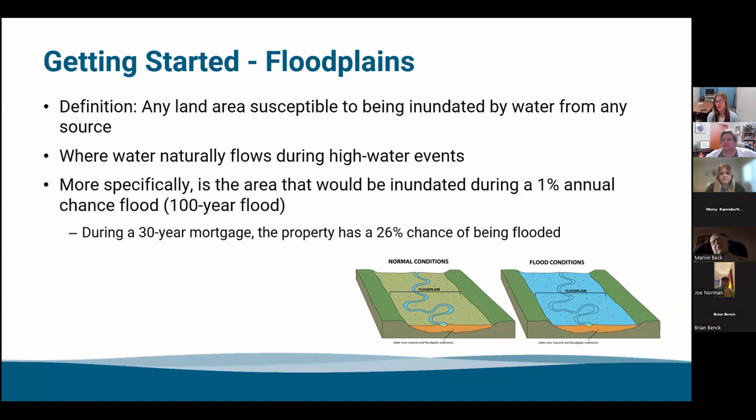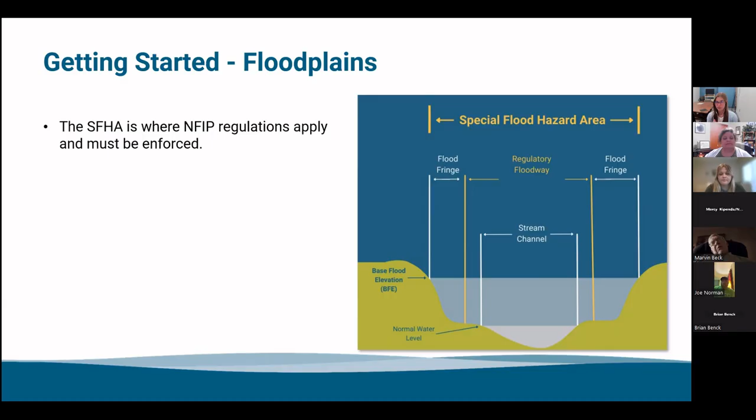The special flood hazard area, or the floodplain, is where National Flood Insurance Program and local regulations apply and must be enforced. This image shows a cross-section of what the floodplain looks like from the side, with a lot of different terms. The special flood hazard area encompasses all of it, including the flood fringe, the regulatory floodway, and the stream channel. Base flood elevations are also associated with the special flood hazard area—we'll go more in depth on all of these. We just wanted to provide this cross-section visual for you.

For a little more context, there are other groups in the state of Nebraska that also have this partnership with FEMA to delineate floodplain boundaries. That includes the Papio-Missouri NRD and the City of Lincoln, both of which have that partnership with the Federal Emergency Management Agency to map floodplains in their jurisdictions.

All right, so some first steps to think about in your role as floodplain administrator if you're newly appointed or starting out. We recommend that you start with becoming familiar with your floodplain boundaries. You can use our interactive map on our website, the official FEMA FIRM panels, or the flood insurance rate map panels to study the boundaries in your jurisdiction.

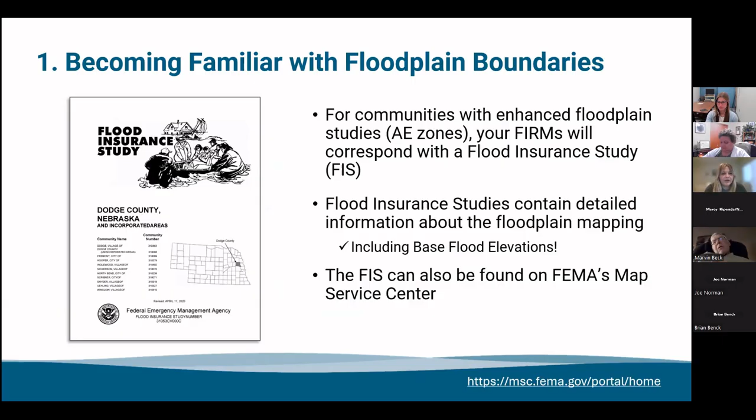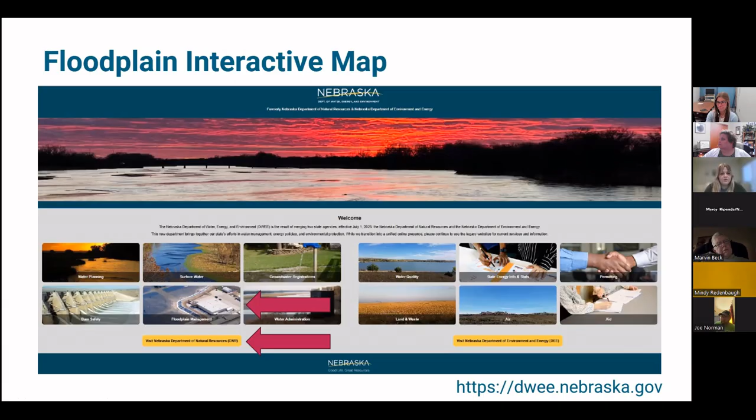Once you get to the legacy website, this is the welcome page for that. If you hover over the services section, it'll bring up a drop-down box with more options on where to navigate in the website. Over on the left is the floodplain management section. There's a bunch of different things available on our website—we'll talk about that later as well.

But at the very top of those options is the interactive maps. Clicking on that button will take you to our interactive map page, where you'll see our old interactive map, which is still usable. But we did just recently come out with our new updated interactive map. It has a new design, is hopefully more user-friendly, and has additional features that are hopefully useful to you as the floodplain administrator.

We're really urging people to use the new interactive map so you get more accustomed to the changes that are made before we take down the old one.

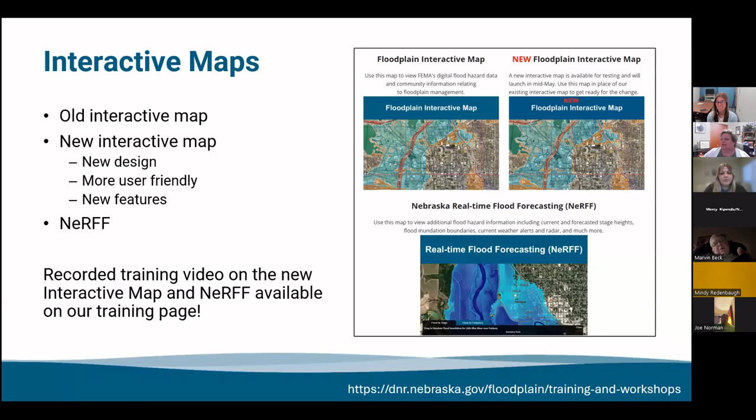And then also on that page, we have the real-time flood forecasting site, or the NeRFF tool, which again, we have an after-hours class in February coming up, and a recorded training video on our website that goes over all the features on our new interactive map and NeRFF as well.

So when you are looking at your FIRM panels or your floodplain boundaries on the interactive map, there can be a ton of different things going on, different shadings, different patterns that dictate different types of floodplain. And those types of floodplains represent different flood risks.

They're typically identified by letters and numbers. In Nebraska, you'll most often see regulatory floodplains identified by Zone A. You might see Zone A-99 or Zone X. Some of these are regulatory floodplains, and some are just there to indicate some sort of flood risk. Your high flood risk areas would be identified as Zone A, Zone AE, A1 through 30, or A99. Your more moderate to low risk zones will be labeled as a shaded X, an unshaded Zone X, or a Zone B or C. We'll talk about that later as well.

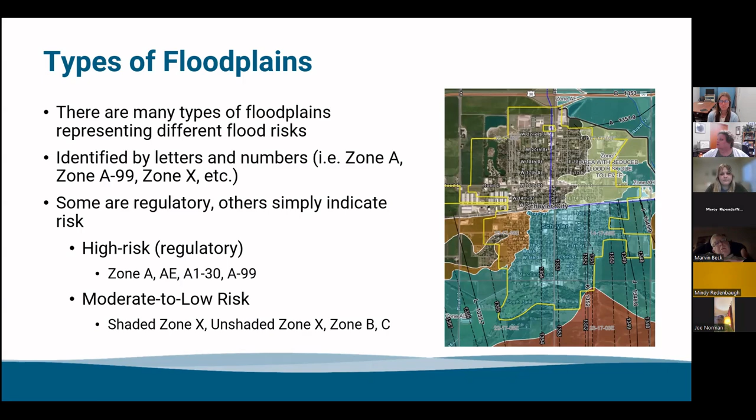All right, so breaking down the different parts of the floodplain on a FIRM panel. The Zone A is the flood hazard area that does not have base flood elevations available. If you needed to determine a base flood elevation, you can contact our office and we can help you get that for free.

But it would be shown as a blue shaded area on the map. On this map, it does have an enhanced study. So the more solid blue shaded area is a Zone AE in the 1% annual chance floodplain, and this has base flood elevations available. You can use this FIRM panel along with your flood insurance study to determine the base flood elevation.

And then the lighter shaded area in the middle of that blue zone that has the white dashed marks, that is the designated floodway. As you can see, it can be kind of difficult to view that on the FIRM panel. So if you're having trouble determining different zones, use this along with the interactive map to determine what you're looking at.

And then on this one, they do have a shaded X zone, which is the 0.2% annual chance floodplain. This is depicted in the black dotted shaded area. Now, in most cases, the 0.2% annual chance floodplain is not regulatory, meaning if you were to have a development proposed in this area, it may not require a floodplain development permit. There may not be regulations associated with that development, but it's good to know that there is some risk of flooding when building in that area, especially knowing what kind of developments are going to be placed there. If you have any critical facilities, there may be additional regulations that apply there. So it's good to know where that zone is on your maps.

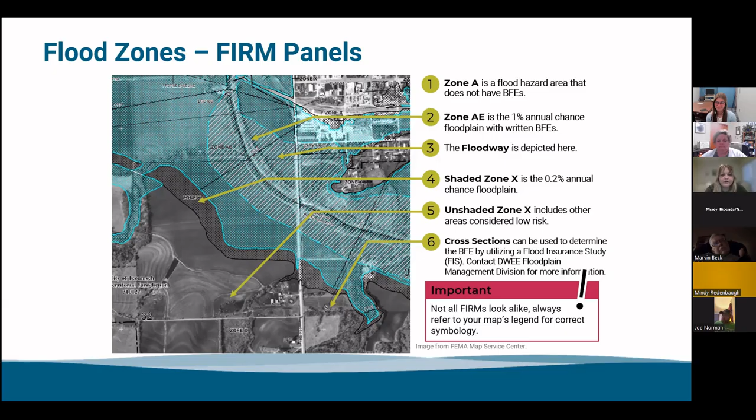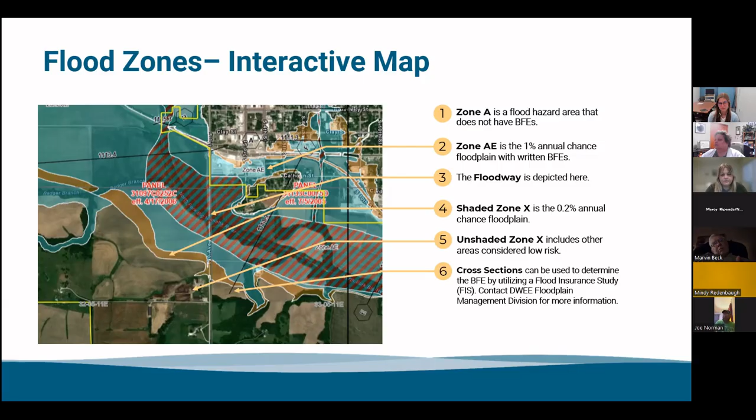So next, another great thing to do when you are in the floodplain administrator position is reviewing your requirements for floodplain development. These are all listed out in your local floodplain management ordinance. Again, if you aren't sure where that is, contact us and we will help you either find it or adopt a new one.

This could be a standalone ordinance that you created, maybe based off of our model, or it could be incorporated into larger zoning and building code documents. So if you're not sure where that is, do a little digging around, look in your zoning regulations or building codes, it might be incorporated in there.

But the NFIP floodplain regulations are governed and enforced at the local level. All of the authority and everything that talks about your floodplain regulations, your enforcement authority, is in your floodplain ordinance. So if you are getting pushback from anybody in your community about the regulations you're trying to enforce, refer back to your ordinance and you can share that information with them, letting them know where that comes from. But your ordinance is the backbone of the Floodplain Administrator Authority.

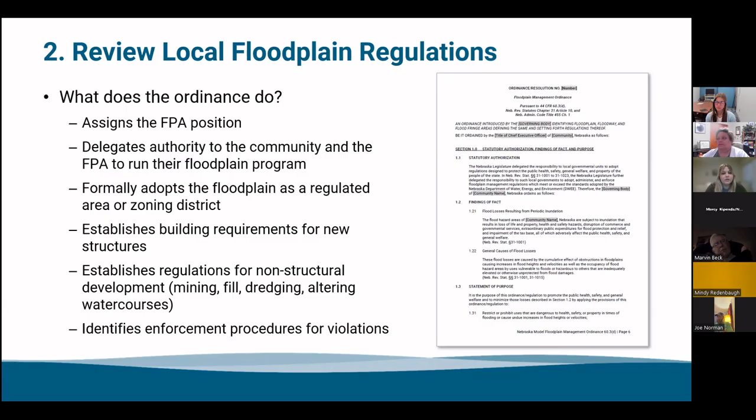All right. So again, all communities that are participating in the National Flood Insurance Program were required to have an ordinance when joining. So if you can't find it, contact us and we will help you find it or get a new one. Your floodplain ordinances were required to meet or exceed state and federal minimum standards.

These minimum standards for the state are listed out in the Nebraska Administrative Code, Chapter 455, or Title 455, Chapter 1. And Nebraska Revised Statute, Chapter 31, Article 10, is what gives the local community the authority to enforce these regulations. The federal regulations are listed out in the Code of Federal Regulations, Title 44. On the next slide, we have an image that shows the development of that.

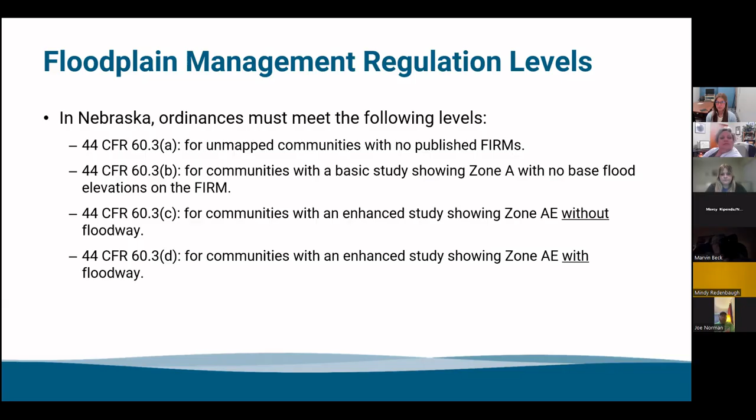If you're not sure if your ordinance is compliant, reach out to our office. That's something we do pretty regularly, is review community ordinances to make sure they are compliant and meeting the minimum standards that are required. If you're going through that mapping update, we will review that ordinance as well, again to make sure there's nothing else that needs to be updated along with adopting those maps.

You can review those model ordinances on our website. They are available. We are coming out with an updated model ordinance. We are going through a pilot process right now, so hopefully that will be available soon. But we do have a couple trainings that go over the differences in that new model available.

Updating your ordinance may be necessary if it doesn't adopt the current floodplain maps, if it's missing required regulations or definitions, or if it's more than 15 years old. There might be some missing sections that are required that may need to be included with that.

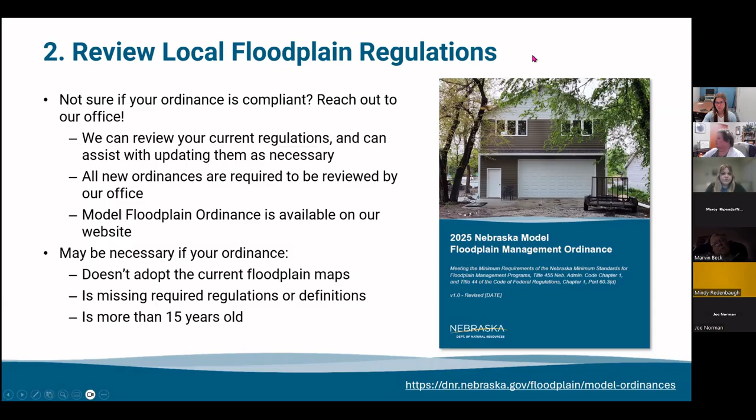So we'll show what the ordinance adoption process looks like for Nebraska. It starts when you go to your board and discuss updating your ordinance, and the board agrees on starting that process. You would review the model ordinance, choose to keep or remove any of the optional language or higher standards, and this is where you would assign the floodplain administrator position.

Once that draft is completed, you would submit it to us at the department for a review. We estimate this review takes around 10 working days—sometimes it's shorter, sometimes longer. This review includes a cross-check with the state and federal minimum standards, just making sure everything is compliant.

Once we're done with that review, we will provide you with any comments that include any missing language, incorrect FIRM panel references, or anything that needs to be changed. It'll be the community's responsibility to make those changes, and that could happen multiple times—we could go back and forth.

Once that is done and we have approved the drafted copy, we will send that over to FEMA for their final approval. Again, we estimate this takes around 10 working days—sometimes sooner, sometimes a little longer. If FEMA comes back with any comments, we will work with you to get that resolved and make the required changes. Once the draft ordinance has all of its final approvals...

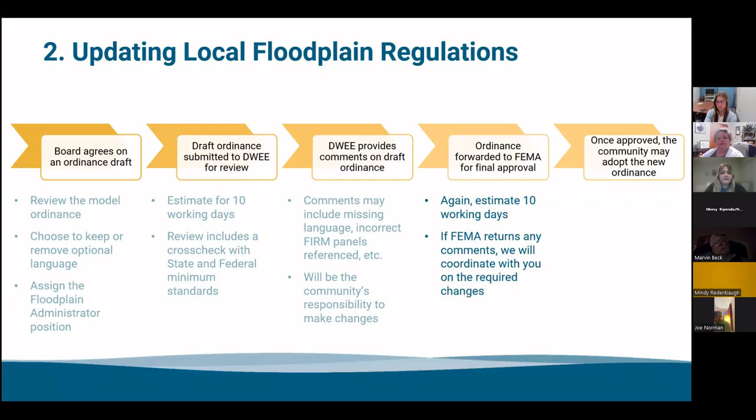We will send the approved copy back to the community for adoption. We'll work with FEMA to get that updated on their end. And we just request a final signed and stamped copy of the adopted ordinance from you, so we have that for our records.

So again, when you're going through any sort of mapping change, or if you're a new floodplain administrator taking over the position and want to review your ordinance, that's the perfect time to consider adopting higher standards. Some examples include requiring the floodplain administrator to become a certified floodplain manager, adopting a higher freeboard requirement, prohibiting development in the floodway, or regulating critical facilities in the 0.2% annual chance floodplain.

There are also some optional standards that aren't necessarily higher standards but make permitting a little easier for your community, depending on what types of development you have going on. This would include wet floodproofing agriculture and accessory structures, or having a time limit for your permit validity—just some different things available to think about what fits best for your community.

Along with that, review your existing procedures. You should know what other groups in your community are responsible for permitting developments. Do permits go to your planning or zoning administrator, your building enforcement, or your community board? Anyone who plays a role in permitting developments, you should have a working relationship with them, so they know to check with you to see if a development is in the floodplain, so nothing gets missed. You should get to know other individuals in your community and communicate where your role fits in, and what the requirements are for your community to stay compliant with the program.

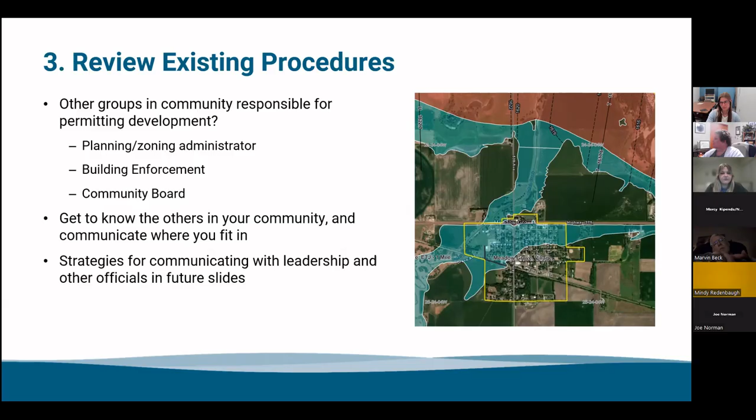And then discuss strategies for communicating with leadership and other officials. We will get into that in some future slides and give you some tips on that as well.

It's important to make sure that you are involved in the permitting process. If you haven't already, reach out to individuals in your community, making yourself known and making it known what your role and responsibilities are and what the requirements for floodplain development are.

Development proposals in your community should come to you at some point prior to approval, as it's the floodplain administrator's job to approve these permits. You want to make sure someone is checking the location of the floodplain in relation to the project, what type of flood zone the development is proposed in, whether a floodplain permit is required, and any additional permitting requirements for that type of development. The biggest point is that somebody has to check on the floodplain before any permit is issued.

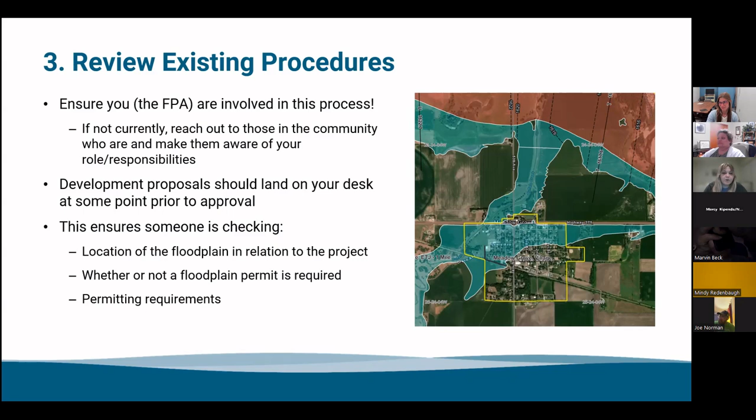Lastly, review or establish the floodplain permitting process. It's important for you to know how your floodplain permitting process works for your community, if you have one.

If you want to go to the next slide, Erin. Perfect.

What are the procedures for reviewing proposals? Who's involved with that review process and the approval process? And what information do you need to ask for? Knowing that process will help make things go a lot smoother when a proposal does come across your desk.

If you don't have a process set up yet, we'll go over some tips a little bit later on. But feel free to talk to us. We're more than happy to help walk you through that and let you know what procedures should look like in the future.

We also recommend writing down your administrative procedures, so if you're not available for a time in the job, or if you pass the job on to somebody else, they have a better understanding of where to start for that role. Anytime you are processing a permit application, write down all the steps you go through and the things you're requiring for those permits. Just have that on hand for anybody else who might be working in this role.

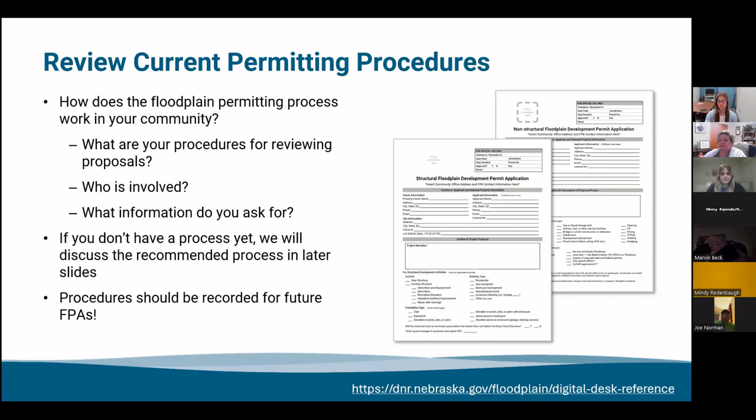Going over what your floodplain development permit looks like, there's no requirement for what the permit has to look like. We do have a couple of model permits available on our website under the digital desk reference that anybody is welcome to use or take as a starting point and alter to your community needs. Since everything is enforced at a local level, you can make your own floodplain development permit.

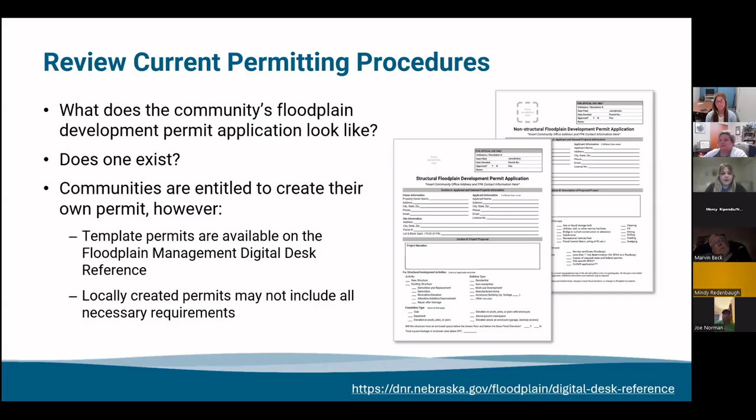You just want to make sure it has a spot for the developer or property owner contact information, collecting all the information for the proposed development, and all the additional floodplain requirements that should be listed on that. Next, we're going to talk about the floodplain administrator responsibilities.

There are a multitude of things the floodplain administrator is responsible for, including reviewing proposals to develop in the floodplain, issuing permits to develop or denying those proposals. You're also responsible for assuring that the maintenance of the flood carrying capacity is maintained within the floodplain, so no unacceptable amounts of rise, that kind of thing. You're also responsible for determining the base flood elevation for proposals.

You're also responsible for working with us at the Nebraska Floodplain Management Team through audits, also known as community assistance contacts or community assistance visits. We'll go more in depth later on what those contacts and visits look like and entail.

You're also responsible for ensuring that any comprehensive plan within your community takes the floodplain into account, as well as following enforcement procedures when non-compliant work is being done in your floodplain. Your floodplain management ordinance will have enforcement procedures laid out, so that's another big reason why you should have that ordinance handy and ready, just so you can reference things when anything may come up.

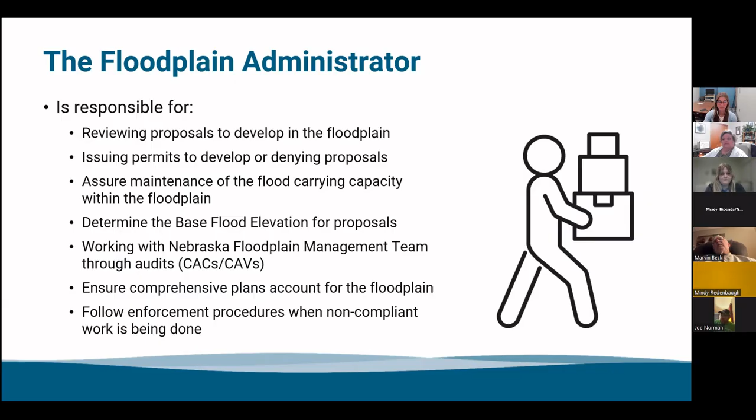So those are the bulk of the floodplain administrator's responsibilities. You'll see that directly outlined in your floodplain management ordinance. However, there are some additional responsibilities that may not be as explicit as those, but they are still something you need to take responsibility of.

A big one there is community engagement. As we made note of earlier, you are kind of the point of contact for community members to go to with anything floodplain related. So it's important that your community members know who you are and know how to contact you. We recommend having your permits and your ordinance publicly accessible for people to reference, as well as doing some kind of regular community outreach, such as sending mailers out to people who live in the floodplain with information related to permit requirements and development standards and so forth, and include your contact information so they can reach out if they have any questions.

Another responsibility is leadership engagement. So you should be talking with your board on a regular basis, or any governing body you have in the community, just so they are aware of who you are and know who to turn to in terms of floodplain management related stuff. Something you can do with them is just review the ordinance at a board meeting on a regular basis, so they continue to be familiar with the regulations in there. If you would like, we can help come speak at a board meeting to kind of back you up and talk about floodplain management and the National Flood Insurance Program. You just have to reach out and let us know. And again, just update them on floodplain issues in the community.

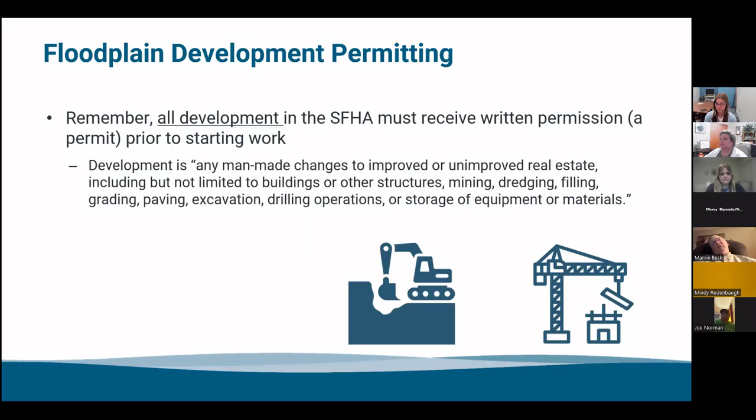So why is the permitting process necessary? Well, it's a condition of National Flood Insurance Program participation. It's also outlined in state and federal law that development in your floodplain as a participant in the National Flood Insurance Program requires a floodplain development permit. Having this permitting process in place also improves community resiliency, because by getting these permits prior to starting work or development, your community members, property owners, and developers know how to build this new development in a safe manner, in a way that's reasonably safe from flooding.

These are also required documents for any community assistance contact or community assistance visit we might have with you, just to ensure your permitting process is in place. You need these documents. And a big one is that unpermitted developments in your floodplain or special flood hazard area are considered violations.

Unresolved violations can lead to probation and/or suspension from the National Flood Insurance Program. Probation is a change in your community status where any existing policies in your community will have a $50 surcharge on their premiums for a period of at least one year, but it may be extended. If the violations continue to be unresolved, it could lead to suspension, which is essentially removal from the program. Flood insurance will no longer be available to your community members if you are suspended—no new flood insurance policies can be purchased or renewed. And disaster assistance may become unavailable in certain instances if you become suspended. So ensuring you have a proper and robust permitting process is necessary to maintain good status in the National Flood Insurance Program.

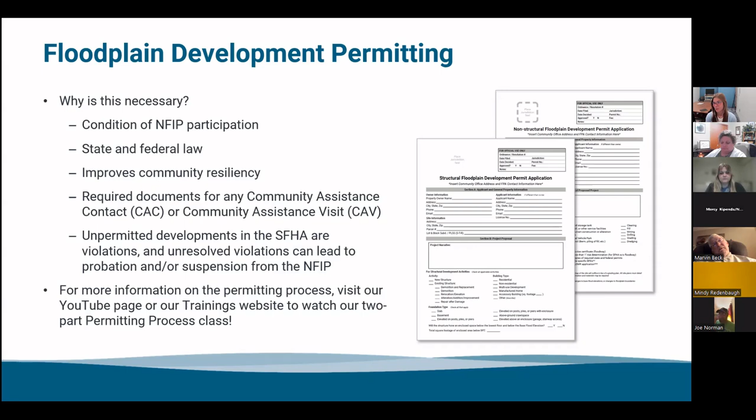A broad overview of the permitting process: step 1 is determining whether or not the proposed development is in a regulated floodplain. If it is not located in a regulated floodplain, a floodplain development permit is not required. Your community may have other local building permits needed, but not a floodplain development permit, so you can stop here.

However, if it is in a floodplain, it will need a floodplain development permit. This is where we continue to the next step.

The next step is having the property owner or developer complete the floodplain development permit application form. This can be tricky for some to fill out, so they may have questions and assistance may be needed. We have an instruction page if you're using our model template that can help them fill out the required portions, so make sure to have that handy as well.

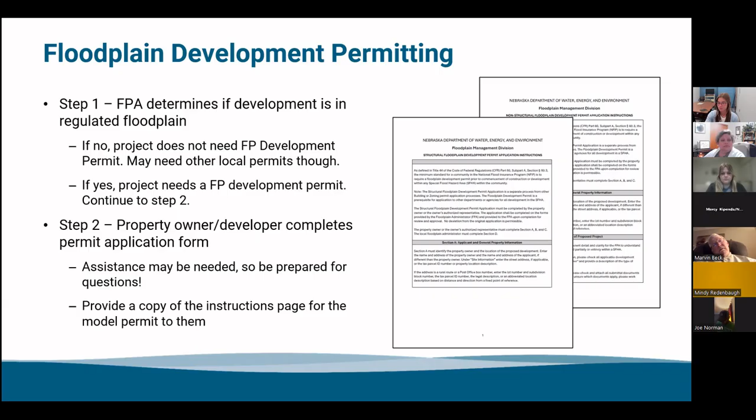Step 3 is the floodplain administrator reviewing the permit application for completeness and correctness. If any information seems to be missing or incorrect, do not approve the permit, and don't approve it on the promise that they'll fix the information. Instead, return the permit application form to them with a request for information form.

We have a template request for information form you can use. On this, you would fill out information that identifies the permit you're working through, as well as marking or adding comments on what you need more information on, what submittal documents might be needed, or more specific site location, that kind of thing.

If you are unsure about any of the information they've provided, we can help you review permits and submittal documents if you'd like—just reach out to us. We aren't an enforcement or permitting authority, so we can't tell you whether to approve or deny the permit, but we can provide comments and guidance on what you should ask for.

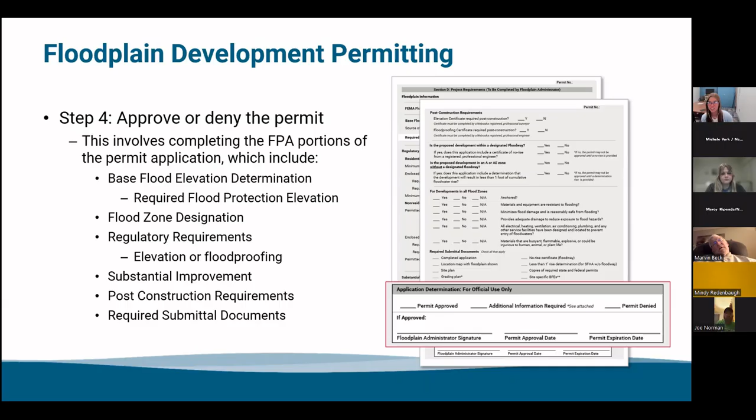So again, with approving or denying the permit, there is a small box at the end of the permit application form where you will notate whether the permit is approved, denied, or if you are requesting additional information, which goes back to the previous step with that request for information form. If the permit is approved, you will sign and date the permit as well as providing a permit expiration date. That expiration date ties in with step 5.

Step 5 is when the project begins construction. Construction of the development has to begin within 180 days of permit issuance. The actual work being done may take longer than 180 days, but the start of that construction has to be within that 180 days or the permit expires and a new application is required. This is to ensure that property owners and developers get a move on with their project, and that the information provided does not become outdated because they waited years to start.

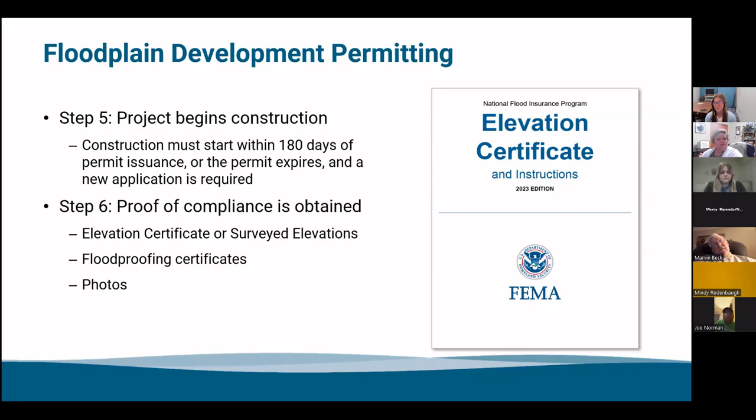Step 6 is proof of compliance. This is going to be very dependent on the type of development that was permitted, and if it's a structure, the use of the structure. This typically includes things like elevation certificates or surveyed elevations of the lowest floor if it's a structure. Floodproofing certificates may be acceptable if it's a non-residential structure. Any kind of earthwork or development compliance documentation might include photographs, updated grading plans, or elevations. Again, it's very dependent on the type of development, so if you have questions about what is required for proof of compliance, reach out to us for guidance.

Now we'll move into base flood elevation determinations. This is one of the roles of the floodplain administrator, determining the base flood elevation for property owners or developers so they know what they need to build to. Base flood elevation determinations can come from 3 different places. If development is occurring in an AO or AH zone, those elevations are found on the flood insurance rate map panel. These are the only 2 zones where the BFE can come from that map.

Any other zone has to come from either our office or the flood insurance study. Our office can help with base flood elevation determinations in basic zone A studies. So if you're a community that doesn't have an enhanced study done in your floodplains, but you know development is going to occur, you can request from our office a base flood elevation determination map, and we'll go more in depth on that in the next slide.

Lastly, if you have AE zones in your floodplain, this is where the flood insurance study comes in. There are study profiles and charts in that flood insurance study that you can use to determine the base flood elevation as the floodplain administrator.

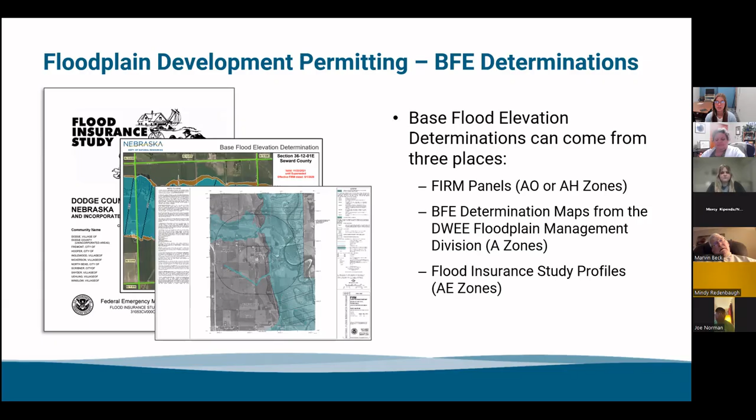Many communities in Nebraska have just the basic zone A studies where base flood elevations have not been determined, so you can't use a flood insurance study to figure that out. That's where we come in. Floodplain administrators have the option to request these base flood elevation determination maps from our website, and we can help with the permitting process. You'll have this first page with the actual map, and then there's a second page with information on uses, which we'll go more in depth on in just a couple of slides.

When it comes to requesting a base flood elevation determination map from our office, it is a free service offered by us. Our in-house mapping staff, this is one of their tasks to help with. This is only for basic zone A studies, basic zone A floodplains. So if you are trying to request this kind of map for an AE zone, or an AO or AH zone, we unfortunately can't do that. That is where either the FIRM panel or the flood insurance study is used.

This is something that can only be requested by the floodplain administrator. You would just go to our website - this is a screenshot of that page where you would select the request a BFE determination. It does require you to log in to make that request. If you are unsure of your login credentials, reach out to Michele York and she can help you figure out the login information.

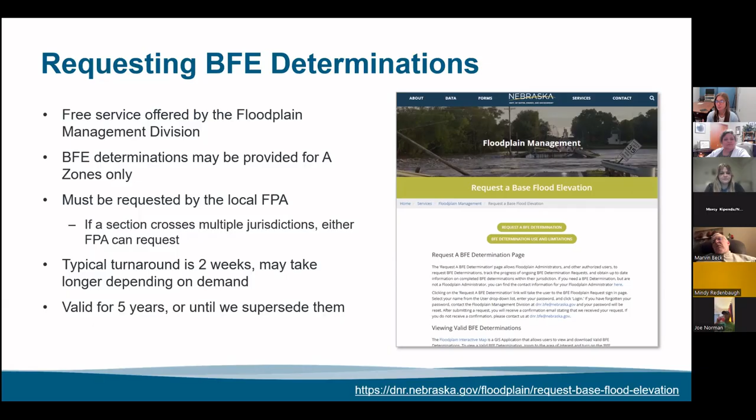Base flood elevations may change between determination requests. This can be due to updated LiDAR, model data, developments that have happened upstream, or you've received new floodplain maps. That's why it's important that you don't print these maps and use them indefinitely - that's why they've got that lifespan of about 5 years. These can be used for permitting, letters of map change, or helping with elevation certificates.

There are some limitations when using this BFE determination map in zone A's. They can't be used for any sort of hydraulic structure, so no levees, berms, dams, that kind of thing. They can't be used for any subdivisions or other developments greater than 5 acres or 50 lots - that's just too large for our office to accommodate. So if you have any developments like that occurring, they need to get site-specific data from an engineering firm.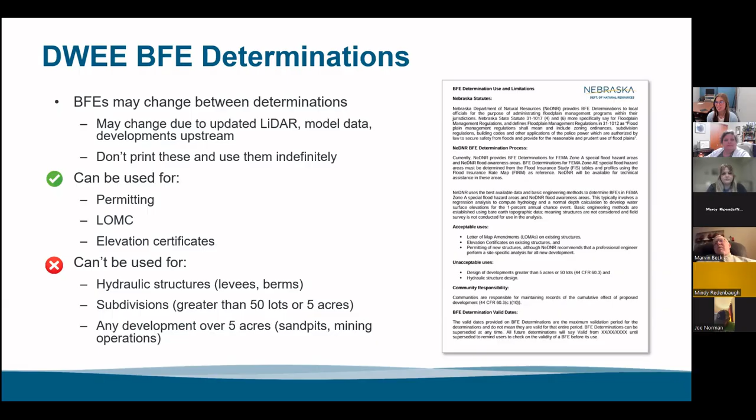I will talk a little bit about the community assistance contacts and community assistance visits. Like Erin mentioned before, they are a part of the floodplain administrator's responsibilities, and all of the responsibilities that Erin just covered apply towards these contacts.

We will start off with the community assistance contact. These are short visits with the floodplain administrator. Any other community officials that want to attend are welcome, and our outreach team conducts these with Nebraska communities approximately every 5 years. So if you have just recently had one with us, you probably have some time before you see us again. If you haven't had one in a while, we'll probably be in touch with you to get one scheduled.

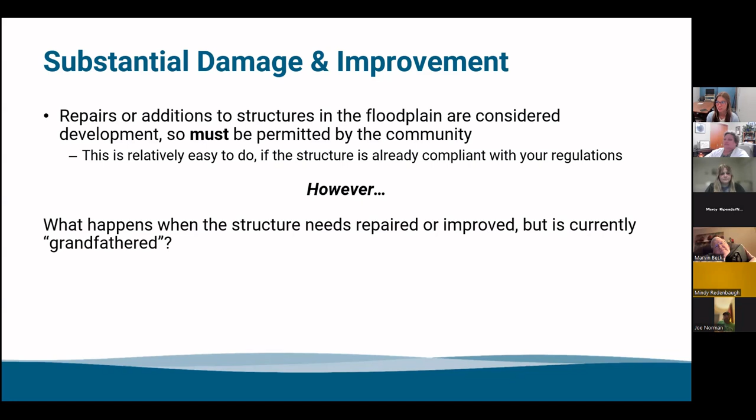So if a non-conforming or existing structure is substantially damaged or substantially improved, it has to be brought into compliance with your local floodplain management regulations. That substantial definition considers it as new development, and new development has to follow your local regulations.

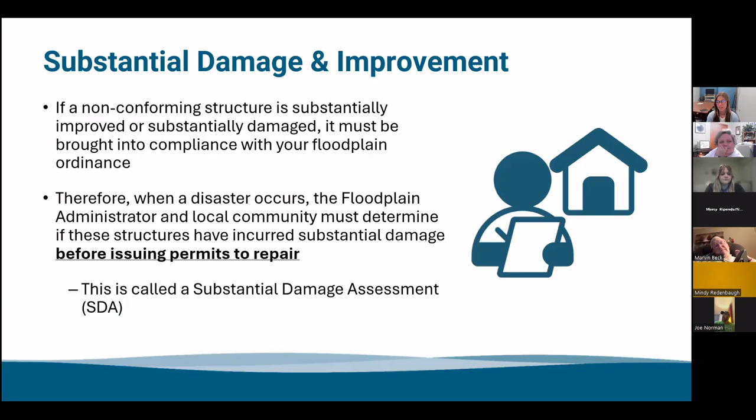So therefore, when a disaster occurs in terms of substantial damage, the floodplain administrator and the local community is responsible for determining if these structures have incurred substantial damage before issuing permits to repair that structure. This is what's called a substantial damage assessment.

So in terms of substantial damage and substantial improvement, this is established as when repairs or improvements to the structure are going to equal or exceed 50% of the market value of the structure. Now, in the National Flood Insurance Program, 50% is the minimum standard for that percentage threshold.

Local communities can adopt a lower percentage threshold as a higher standard. So you can go down to 40%, 30%, whatever you so choose. That is a higher standard that your community can adopt. So make sure you reference your ordinance to make sure you know what that's at.

Communities can also adopt language for cumulative cost tracking. So at a minimum, most of these substantial damage determinations and assessments are going to be on an event basis or a permit basis. But communities can adopt language for cumulative cost tracking. So you keep track of these required repairs or improvements over a certain amount of time.

Once the total of each of those events equals that percentage threshold you've adopted, then in that last event, they'll have to bring their structure into compliance with your local regulations, even if that specific event itself was less than 50%. So again, please check your local floodplain ordinance for your community's expectations if you have that lower percentage threshold or if you have that cumulative cost tracking language.

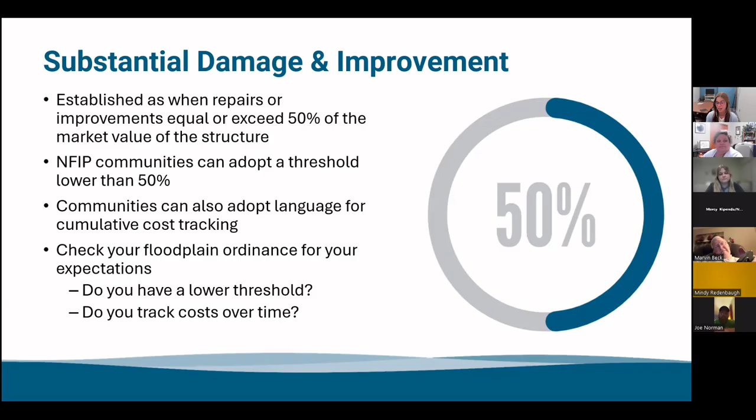So this is just a little visual of the calculation that goes into play when determining if a structure is substantially damaged or improved. You'll take the cost to repair the structure to its pre-damage condition, or the cost of the improvement work, divide it by either the pre-damaged market value of the structure or the current market value, depending on if it's a substantial damage or a substantial improvement determination. Then you'll multiply that by 100 to get a percentage.

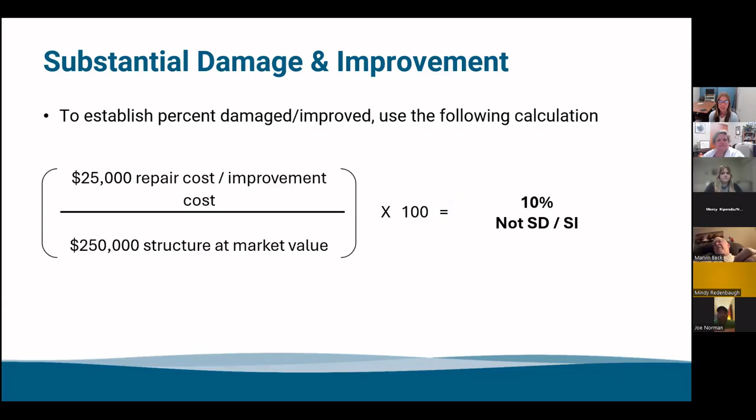So, for example, if the repair or improvement cost is $25,000 and the market value of the structure is $250,000, that would equate to 10%. So the work costs 10% of the value of the structure. It would not be considered substantial damage or substantial improvement in this situation.

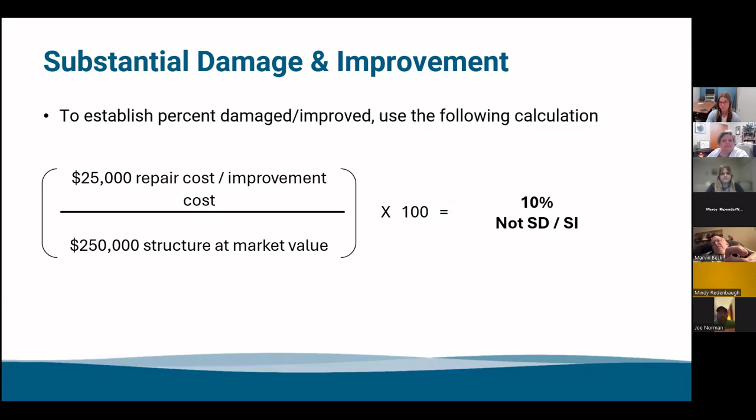Now, some things to keep in mind. There are some required included costs when taking that repair work or improvement cost when making that determination. So that's going to include things such as the market rate of materials and labor. Even if this is going to be volunteered or free from the property owner, you still have to calculate it as if it is being done professionally.

This also includes demolition costs and labor costs, any contractor overhead or profit. All structural elements need to be taken into account. So that's going to be the exterior finish, flooring, cabinets, electrical and utilities, that kind of thing. And any sort of built-in appliances also have to be included in that cost determination.

Now, there are some excluded costs that you don't have to take into account when determining substantial damage or substantial improvement. So that's going to be things like trash removal and cleanup, any sort of temporary stabilization of the structure, survey or engineer costs, permit or inspection fees, any plug-in appliances, or any correction of health, safety, or sanitary code violations. Those are all things that can be excluded from your cost determination.

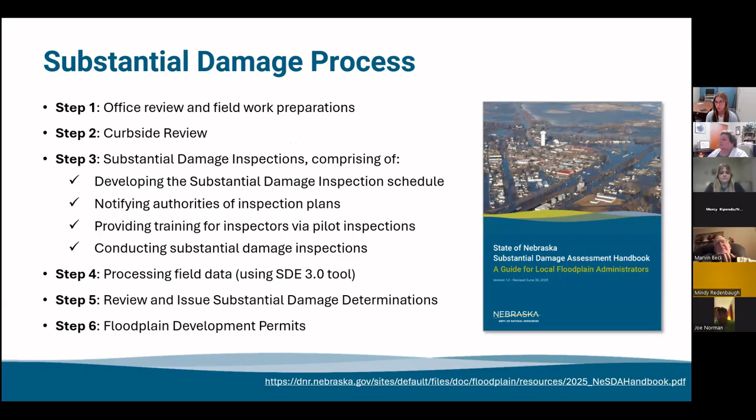Now, the substantial damage process is typically broken down into 6 steps here that you see on the screen. This is also included in our substantial damage handbook that you can find on our digital desk reference. As you can see here, it's laid out pretty detailed, and our handbook is a great resource to learn about the substantial damage process and your roles and responsibilities as the floodplain administrator in a post-disaster situation.

We also have a bunch of other kinds of resources related to substantial damage on our digital desk reference and on our trainings webpage. So if you want more information on the substantial damage process and your roles and responsibilities as a floodplain administrator in these kinds of situations, we highly recommend that you watch our recorded training titled Before and After Disaster Strikes, Substantial Damage 101. This is a super in-depth training on substantial damage, so it will help you prepare for this kind of situation.

And again, we are here to help. If you have any questions related to substantial damage, or if you need any assistance conducting substantial damage or substantial improvement calculations, reach out to us and we can help you with that.

All right, so just to finish up, I'll go over a review of all the tips that we went over throughout this presentation and some helpful resources to go along with that.

So again, the biggest tip that we can give is to network with individuals in your community, your permitting officials, property owners. Build that network within your community so you have that working relationship. It's also recommended to network with other floodplain administrators in your area. Like we showed before, you can go to our website and search up floodplain administrator contact information.